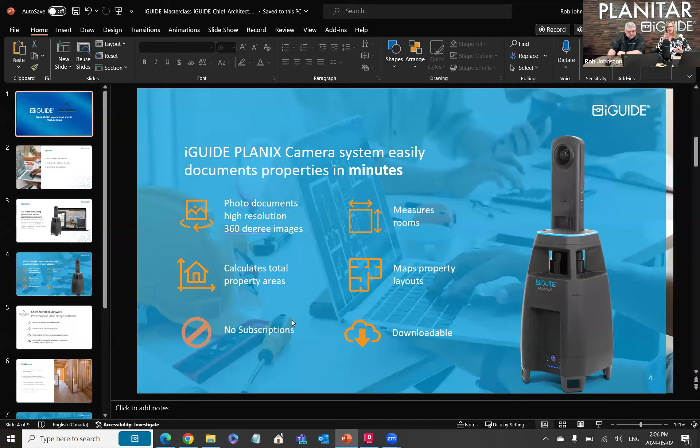Sorry, guys. So essentially today we're going to walk through what both of the products are. We're going to learn a little bit about iGUIDE, a little bit about Chief Architect, because we have a varied audience in terms of experience. Then we're going to dive into the solution, and then we'll talk about some of the benefits—how you can talk to your clients, team, customers, and partners about the benefits of using Chief Architect files and iGUIDE files to build your business forward. So do you want to scooch us through? Crisis averted. My pleasure. Yes.

So you've already mentioned what we're going to do. Charlene and I are on the front end of this equation, getting back to the core idea, which is all about getting to remodeling faster without compromising accuracy. Our camera system is used to quickly capture spaces and accurately provide documents that you can move into Chief Architect to get to your remodeling proposal. Everybody in this space realizes the amount of work involved to capture existing conditions, capture the customer's vision, but also capture the technical side—the drawings and math data involved to propose a renovation. Our product has been around for about 14 years now, and only in the last few years have we pivoted one of our outputs to help support this market, which is the DWG file.

We're now approaching our third iteration of that, developed and refined based on feedback from people like Phil, Chief Architect, and all of our customers about what they're trying to do with it. So we now go and capture properties with our Planix Pro camera. We capture it in roughly 30 to 40 minutes, depending on the size of the residential property, and then produce a DWG output so that you can move that into Chief Architect. Phil is going to walk through that process at a high level to promote some dialogue within the users here. But that's our product in a nutshell—we're at the bookends of the system: going onto the property, capturing the data quickly, subject to difficulty but capturing it accurately, and then producing an output format that can be consumed in a variety of different ways.

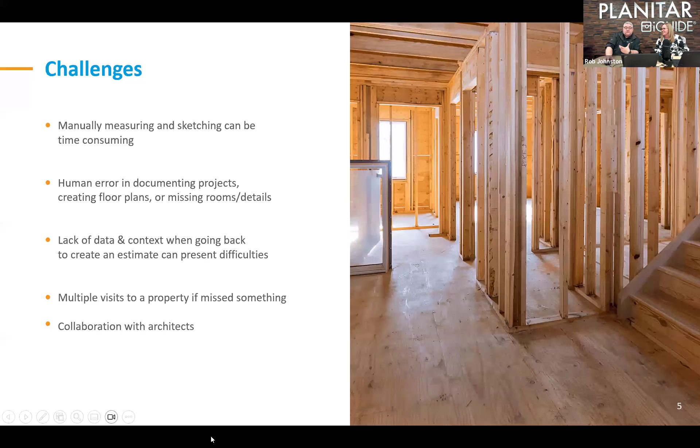So those are the challenges on the front end that the iGUIDE addresses. I'll speed it up a little bit. I'm just going to show you a sample drawing from our output now, which is kind of the starting point for Phil. So again, this is kind of a sample output from our iGUIDE system.

This is what's called an AutoCAD DWG file. This is a premium file, and it's obviously at scale, dimensioned with labels, with ceiling heights. Everything's organized on AIA layers. And what's brand new to us as of January this year is when you scan a multi-floor property, all of the layers are aligned. They're not floating islands that you have to put together - we actually use software tools that we have.

So even though we're giving you individual slices or individual layers of the property, basement, main floor, upper floor, if you actually bring them into Chief or a CAD product, they're all aligned by common walls, load-bearing walls, or exteriors, depending on what you're trying to do. So this is our output, which is the consuming engine on Phil's side.

So Phil, I'm going to stop sharing, and maybe you can start from this input.

Sorry, only because I'm new to this, like full ownership. I'm in marketing, guys. This is why I work with people like Rob, who are much smarter than me at DWGs.

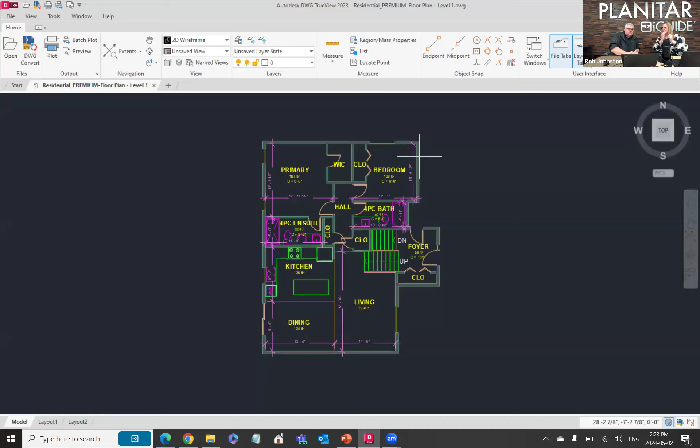But for folks maybe newer to iGUIDE or newer to DWGs, can you walk me through the key highlights of this DWG? If I was to explain it to an architect and say, hey Mary Smith architect, this is what's really great about this DWG and why I trust it, if you were to give me 3 points, Rob, I don't want to go too deep, because I think this also plays into why it works well with Phil's solution, if I understand correctly.

So I'd say the number one thing is that it's drafted against the LiDAR data. It's not people creating a wall based on two measurements, it's creating a wall based on thousands of measurements. We're fusing the laser data that came off of our system, and we're creating the geometry, whether that's walls, windows, doors, patios, whatever it is. We're using the LiDAR data to capture it and draft to that.

And tell me, how accurate is LiDAR then? If you're going to tell me this is perfect, it's great, you can trust it, Mary Smith architect, how accurate is it? Across the property or room, that's a really difficult question, because it depends on the property, depends on how you shoot, but we say a quarter of an inch.

Okay, that's good. And when you say, sorry I ask so many questions, but I know people ask, when you're talking about how I shoot, are you talking about how many times I scan? Because we see there's a difference in opinion here, where it could take you 3 hours or it could take you 30 minutes. That's just how many times I would scan using my camera, is that what you mean?

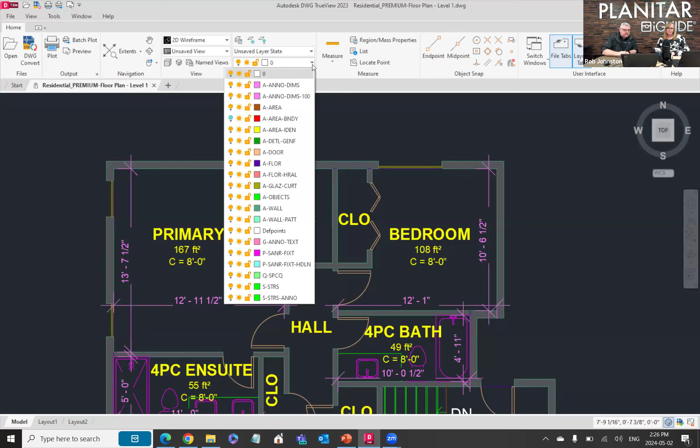Any architect in North America familiar with architectural standards knows we draft everything and put them on the appropriate layers. And then the room labeling, as simple and silly as it is, when you're looking at a property externally and weren't the one who went on site, the room labeling helps you get up to speed with the property that much faster.

I have a good question from Bruce. He asks, can you get measurements of the smaller dimensions of the room? He found that square footage is calculated from the largest measurement of the rooms, i.e. doorway entrance of the room. So he's probably looking for things like counter height, doorways, and those details, calculating the measurements and bringing those together.

So again, we're drafting a 2D floor plan of what the LiDAR captured. If there are other pieces of the room that you need dimensions for, you're going to use our measuring tools within the iGUIDE - measure mode 1, measure mode 2, measure mode 3 - to get those extra pieces of dimension. But we're only drafting what the LiDAR has measured. You do have the ability to find those measurements using the iGUIDE tools. So real quick, the quality of the geometry, the layering, and the labels are what really sets it apart.

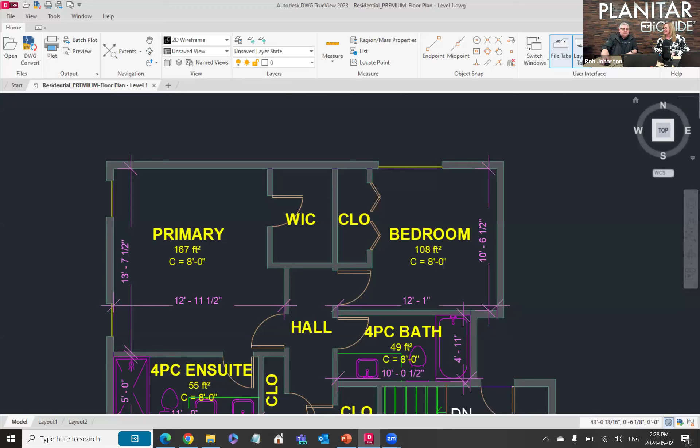Okay, Phil, you ready to take this show away? I'm going to stop sharing. Phil, this is a great place for me to jump off the diving board, or for you to jump off. I'm excited - I don't know much about Chief Architect, and Phil's an expert, so he's going to show us all the tips and tricks. I'm going to take a moment while Phil's getting prepped to look at some of the questions here.

Alyssa Hoffman has a good question. She's a 20-year plus Chief Architect user and about one month into using iGUIDE. Should she use iGUIDE on the inside or outside of a building? Can she have iGUIDE create a 3D file for Chief, and import the Revit 3D file into Chief? So a couple questions there - using iGUIDE inside and outside, and also importing a 3D file into Chief.

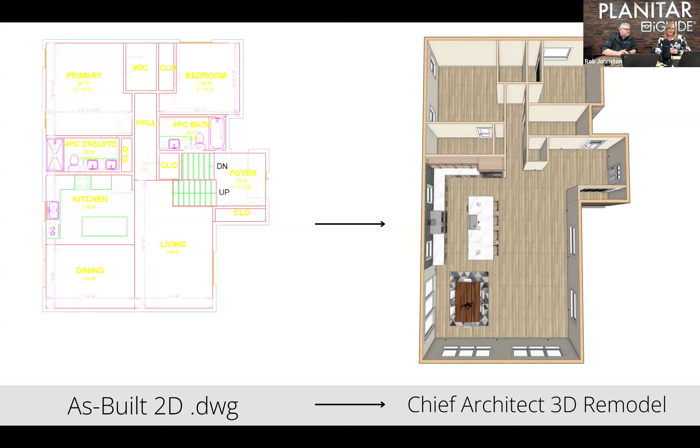So you can use it inside and outside. You have to set your expectations of what we're going to draft outside, because we're an inside measuring company, but we will draft external objects. That requires a much longer explanation than we'll answer today, but you can do both. And yes, we can draft Revit files, but I believe the best input to set up renovating spaces in Chief - Phil will answer this - is to go with the 2D DWG format. Okay, awesome, great questions coming in. Go, Phil.

Perfect. Before I get going, can you guys see my screen? Yes, perfect. So as we've been alluding to, once you've gone through the iGUIDE capture system, you'll be produced with a DWG file that looks something like this.

And then from here, you can bring it into Chief Architect, convert it to your as-built file, and then create that copy of the as-built file - call it the remodeled version - do your remodel work, and then you can overlay the two to show exactly where those changes will be occurring.

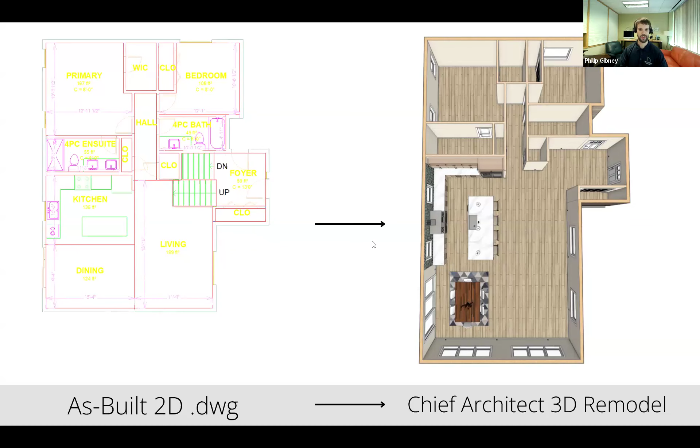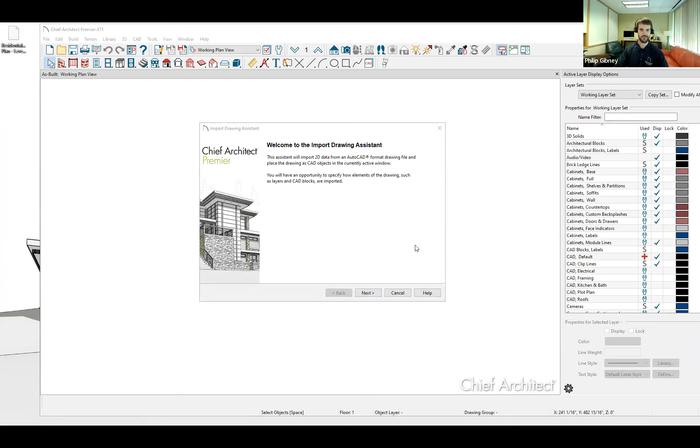So let me pop open Chief Architect real quick. All right, so here I am in Chief Architect, and I'm just going to bring in a CAD file that Rob sent me. I have that CAD file right here on my computer, and I'm just going to drag and drop it into the screen. When I do that, it's going to open up a wizard that will ask us some questions about how we want that file to import.

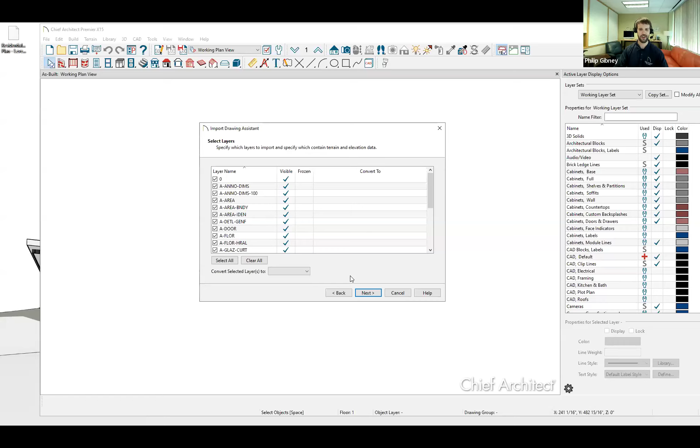So on the first menu of the wizard, it's going to ask you some questions about some miscellaneous file settings. I'll just go ahead and click on the next screen. If your CAD file is a topo survey file that you've obtained, you can convert that into a Chief Architect file. We're not covering that in this webinar, but it's something that you can do.

This menu is asking what you want to do about the layers from the DWG file. We want to bring those layers in as we had left them off in the iGUIDE system. This next question asks about your unit of measurements. I'm going to leave them in inches and click OK.

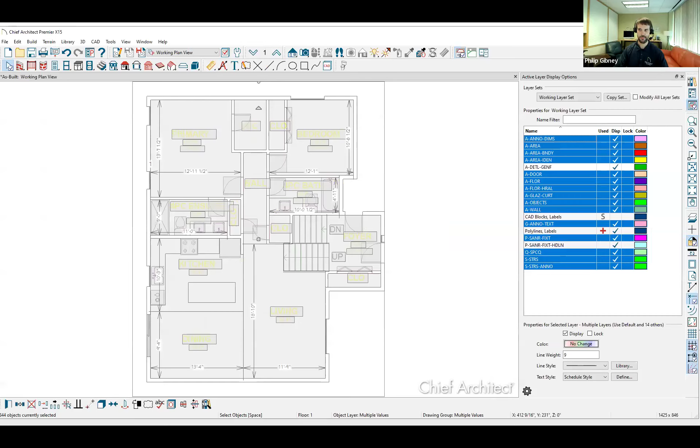Then we'll click on Finish and see what we get. Once I've done that import, we have that CAD file exactly as it was left off and captured within the iGUIDE system. Chief Architect is a layer-based program, and on the right-hand side of the screen I have my various layers. These layers towards the top are some of those that came in through the iGUIDE system.

Now, when you do the CAD to wall conversion to convert it into a 3D model, the only thing Chief Architect will convert into 3D is the structure of your plan - so your walls, doors, and windows. Things like your cabinets and your fridge don't come over during that conversion, but they can be manually added later if you need to see them in the as-built conditions.

So when we do the CAD to walls conversion, the first step is to recognize what layers all of the individual objects are on - we need to identify the layers for the walls, doors, and windows. On the right-hand side I have this menu open called the Active Layer Display Options. If I click on one of these lines representing the wall, we can see it's on the layer A-wall. At this point we're just making a mental note, and we'll proceed to recognize the layers for the doors and windows.

Next, let's do the doors. I'm going to click on one of the doors in the plan, and you can see it's on a layer called A-door. One thing I'm observing about this layer is that the individual lines making up this entire door are blocked together in a CAD block. When you do the CAD to walls conversion, you need access to the individual lines that make up the walls, doors, and windows. So I'm making a mental note that I'll need to take these CAD blocks and explode them into individual CAD lines, which I'll do here in a second. So the doors are on the A-door layer.

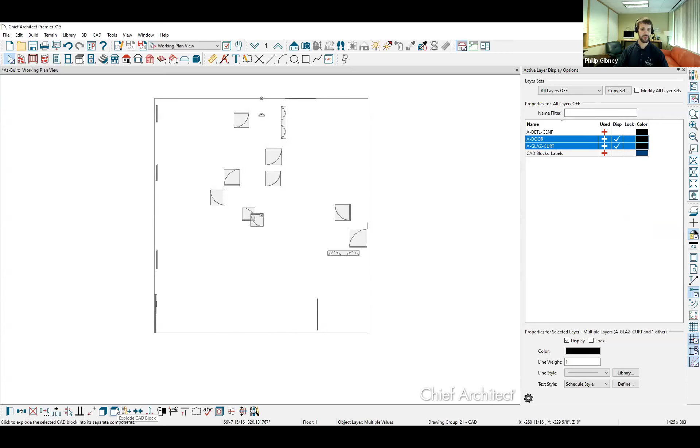Next, we're going to turn on the layers for the CAD lines representing the doors and the windows, so that's all we see in the plan, and then we'll explode them into their individual CAD lines. To do that, I'm just going to left click with my mouse and draw a marquee over the doors and windows - I've got them all selected. Then in the bottom toolbar there's a button that says 'explode CAD block.' When I click on that, it explodes them into individual lines and they're no longer CAD blocks. That's all the work we're going to do with exploding them.

The next thing I'm going to do is turn off those layers for the doors and windows. I like to keep my layer sets clean as I need them. With all layers off, I'll turn those layers off and then come back to the working layer set.

So we've now obtained some information that we need to do the conversion to a 3D model. That feature that does the conversion is called the CAD to walls feature, available by going up to the CAD menu and then down to CAD to walls.

This menu is going to ask you to tell the program what layers from this CAD file are going to represent the walls, windows, and doors. So from this drop down, I'll say the wall layer is going to be that A wall layer, the window layer is going to be that A glaze layer, and the door layer is going to be the layer A door.

Making our way down the menu, you could do railings if you wanted to, but we're going to skip over it.

Below that, there's an option to set wall types. Wall type 1 I have set up to be a wall type called siding 6 plank - it's made up of a sheet of drywall, a 2x6, OSB, and then a plank siding material. Wall type 2 is a wall type called interior 4 - it's a half inch of drywall, your 2x4 which would be 3.5 inches wide, and then another half sheet of drywall. So the total thickness of this wall type is going to be 4.5 inches.

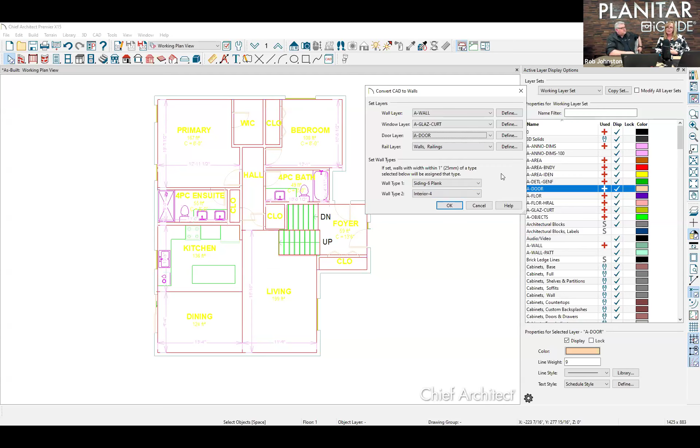So the way the wall thicknesses work is, let's pick on these red lines representing the interior walls. These lines are on that layer A-dash-wall, and the program is going to measure the distance between those two lines. If whatever that measurement is within 1 inch of the thickness of either of these wall types, it's going to try to use one of these wall types. So in this example with the interior 4 wall, if that wall is within a 3.5 to 5.5 inch variance, it's going to use that interior 4 wall type and place it there.

So from here we can just click OK, and then the program should produce our CAD to walls. Let's take a 3D view and see what we have. Up at the top, there are different 3D camera tools - one of them says perspective floor overview, and then we'll be in our 3D view.

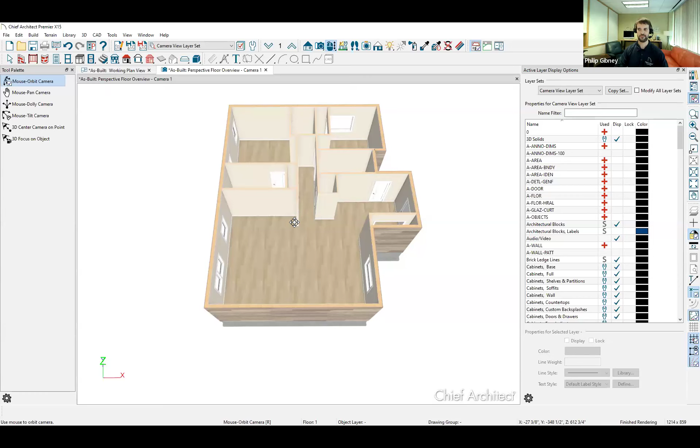That's cool. I was just going to take a step back and mention something Ivan asked - the thickness of those walls is usually determined when you're capturing a property. It asks you, when you're on that floor, what is the exterior wall thickness? They typically key in a value saying this is a 4.5-inch wall, or this is a 6.5-inch wall, and they key that in, and then our drafting team knows what to draft it to - especially if you've only captured the inside of the house.

It goes back to, well, how thick do you want me to draw the wall? So that does come easier. Yeah, good point.

So in Chief Architect, this may be a bit of a deeper dive, but there's this concept of wall types where you're building out how those wall types are constructed in regards to drywall, stud, OSB, and so forth. So you're essentially setting the wall thickness through those wall types. And with this iGUIDE system, if you're setting the wall thickness, you want to make sure your wall thickness in Chief Architect matches with your guys' thicknesses.

When we were on our DWG 1.0 level for about 8 months last year, we were still drawing wall types that weren't uniform. So where Ivan may have experienced different wall thicknesses as it came into Chief, now when we launched to 1.2 with the North American drawing standards, they're all 4.5 or 6.5. That's how we're going to correct for it or draft it on our side, unless there are notable exceptions.

There are always notable exceptions, architecture has different things going on. But by going to the default standard North American wall thicknesses, it makes things uniform to our standards, and that way it's a lot easier for Chief Architect to consume and get to that point pretty quickly.

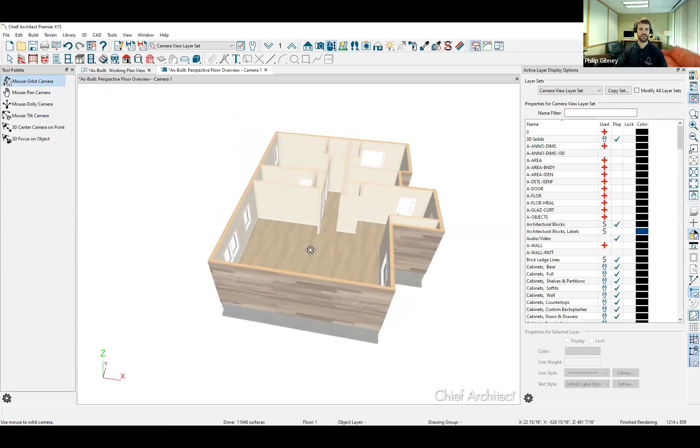So once you have something like this, a couple things happen. Chief Architect has a lot of automated features to jumpstart the design process. You can see a foundation automatically came in underneath these walls, framing gets automatically built within those walls, and if you have roofs, those will get built as well.

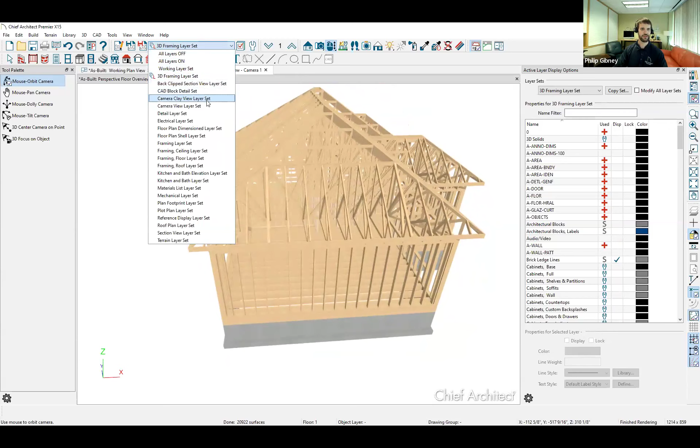So from here, we're in the as-built version of our plan. But if you need to make a model to show the client 3D renderings or get your construction documents produced, the first thing you want to do before making any changes is create a copy of the file and call it the remodel. To do that, you would go to File, Save As, and give it a name.

Before you do that, can I ask a question? There are a lot of our customers that will measure the basement and capture the foundation. Sometimes it's bare concrete, sometimes it's studded, sometimes it's drywalled, sometimes it's the big white insulation. But if we drafted that and moved it over as its own basement layer, could we import it as a drawing and assign it as a foundation and use that?

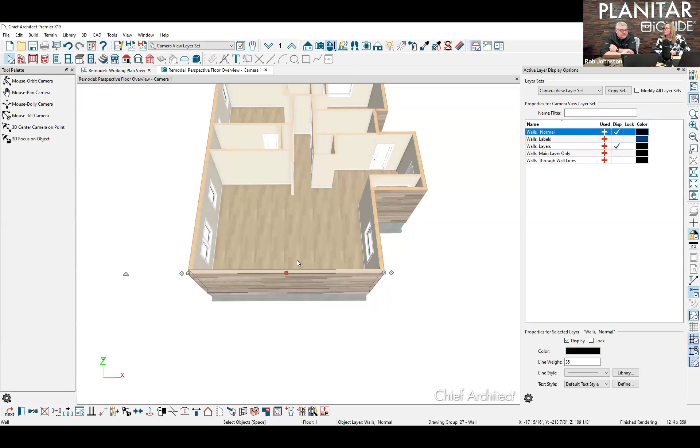Good question. What you would want to do in that scenario, in my opinion, it would be easiest to get a second CAD file for the basement, so you have two CAD files, one for the first floor and one for the basement. In Chief Architect, up at the top there are different floor indicators telling you what floor you're on. You can create a basement, or go down to floor 0 where I have that foundation. When you initially start working on your foundation or basement, you can have it be a blank canvas, then import that CAD file of the basement and do the same CAD to walls conversion to get the basement in place.

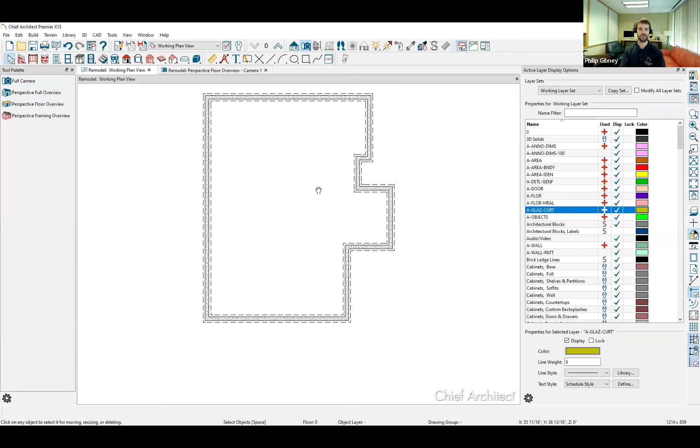Same thing with the second floor, you would go up and do the exact same thing if you had one. And because we're exporting them as aligned, I assume that means they would be aligned when they come in and automatically stick the foundation underneath the main floor. It should, yeah, it should go to the drawing origin coordinates when you do that initial import.

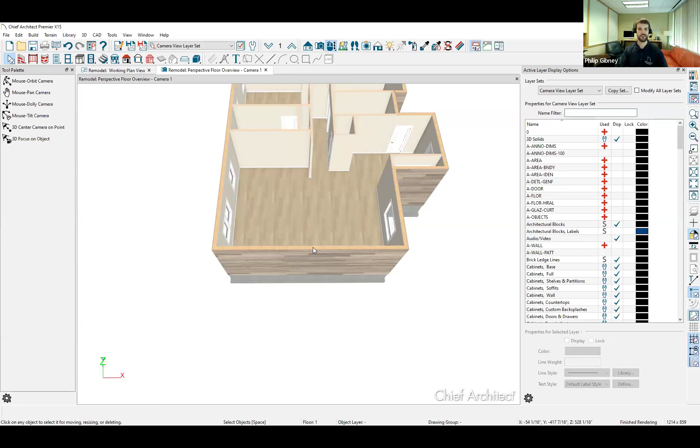Great, thanks for that, I know it was a deviation, but let's show some remodeling. So let's say in our hypothetical scenario we have a small kitchen and a small dining room, and we wanted to do an addition to expand the kitchen and dining room. We're in the remodeled plan, which is the appropriate plan to do the work in. For example, let's say we wanted to move this wall out so we have more space over here, then put in sliding doors over here, and add some windows over here.

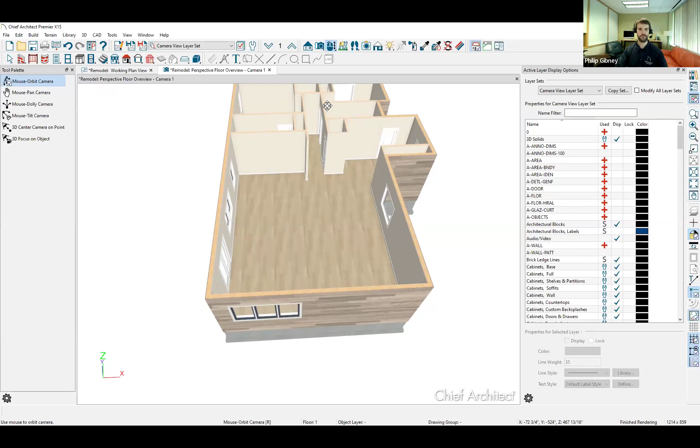There are cabinetry design tools, you can add cabinets and create your kitchen as needed. At the end of the day you'll have a fully fleshed out remodeled plan. I have a second copy of this file where I've already gone through and made a fully fleshed out remodeled plan, so I'm going to close this one and open the other one I have.

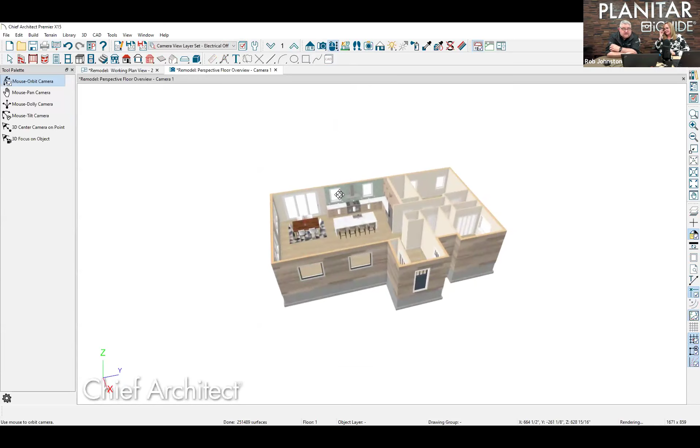I have a question, Rob always has questions. Phil, can you go to the 3D version of this? I always hear clients make a statement: I need to get to the rendered version of the proposed renovation or remodel, not quickly, but efficiently, and make it look nice. So how does that appear, or what would they do in Chief?

3D rendering is automatic in Chief. You don't really need to do any extra work to create a 3D view such as this one. There are different rendering techniques that show or hide different levels of detail.

For example, let's say you made this initial design of the kitchen and you wanted the client to give you feedback about the free-form geometry of the kitchen, but you don't want them to get bogged down by this backsplash material or the countertop material. I'm in a rendering technique right now called the standard rendering technique. If we wanted to hide this level of detail about the specific tile or countertop selections, we could switch to one of these other rendering techniques, such as this one called hand-drawn lines.

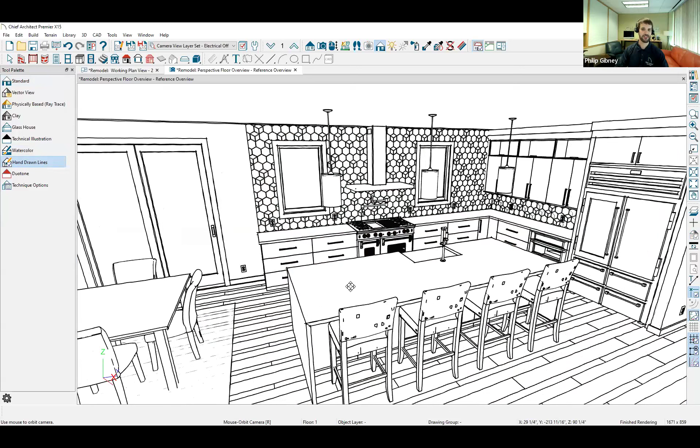This one removes some of the color from our design. Instead, we're seeing a black and white version of the model. It's an easy way to minimize the distractions the client might see and keep them focused on the task at hand, so there's not a lot of extra work needed to create views like this. It can help gear your sales pitch with the client in the direction you need it to go.

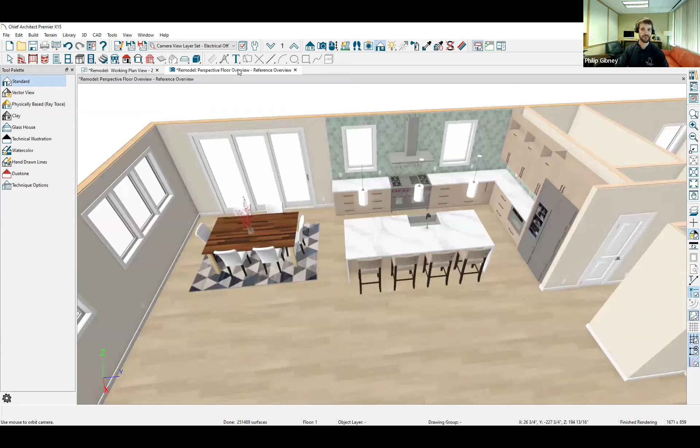This is the 3D version of the model. You can work in both 2D and 3D at the same time, having these pulled up side by side as you need to. So I'm in this floor plan view and you can see the kitchen that I have. Up at the top of the screen there's a drop down to switch between different views you might create, like an electrical plan versus a framing plan.

So this is fine and dandy for a floor plan view, but it might be a little difficult for a client to visualize how the two changes look one on top of another.

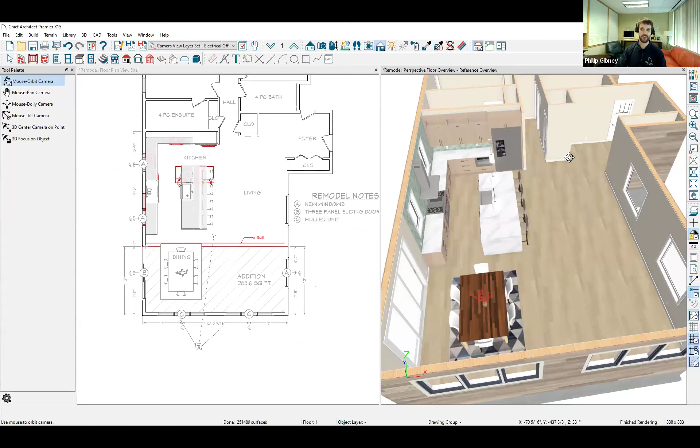That referencing also works in the 3D view. So if I jump back to this 3D view and press that F9 key again, it'll turn on that reference. Now it's very easy to see, hey, this is where this wall previously stopped. If we bump this out about 12 feet, you'll have room for a larger island, and then you can have a nice sized dining room as well. And hey, this is where your island was before.

We can turn that 90 degrees and have a much larger cooking area in this space.

So would you say - and I know the answer is going to be it varies - but would you say a lot of your customers just focus on changes to walls, windows, and doors, or do they go to the full extent of remodeling, like putting in a new kitchen, new cabinets, and so on?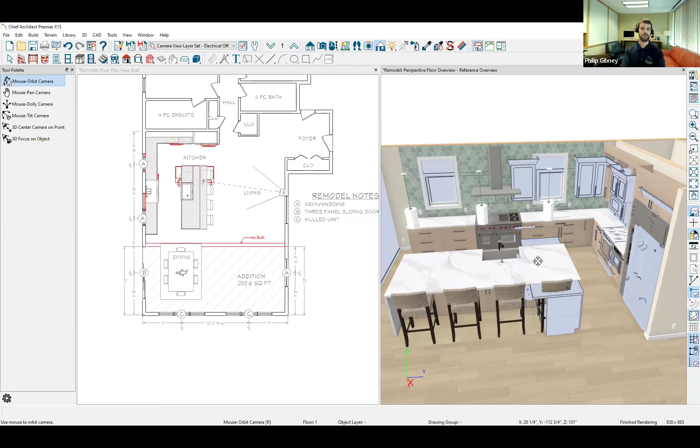I would say most of them go as far as the project entails. If you're doing something like a sunroom or a new deck, you probably don't need a model all the way out to showing cabinetry and furniture. It's something you can add as a bonus to give them better ideas of what the depth of space might be and what furniture will fit. But you need to listen to what the client's end goal is, and add that level of detail. If the client says 'I need a new kitchen,' you're probably going to go as far as adding all the cabinets and appliances like I've done here, so they can get a better idea of how their new cooking and cleaning area will come together.

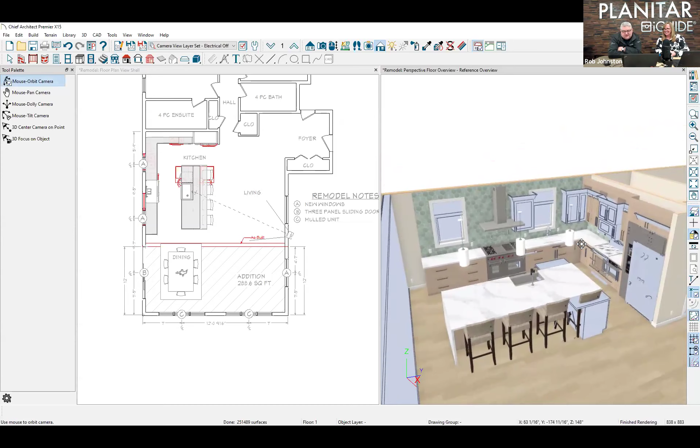So now I have a question that takes us all the way back to the beginning. Is there any way you could go back to the way you originally brought in the DWG file? Yeah, I should be able to. Let me pull up the as-built plan - I've got the remodeled plan open right now, let me pull that up.

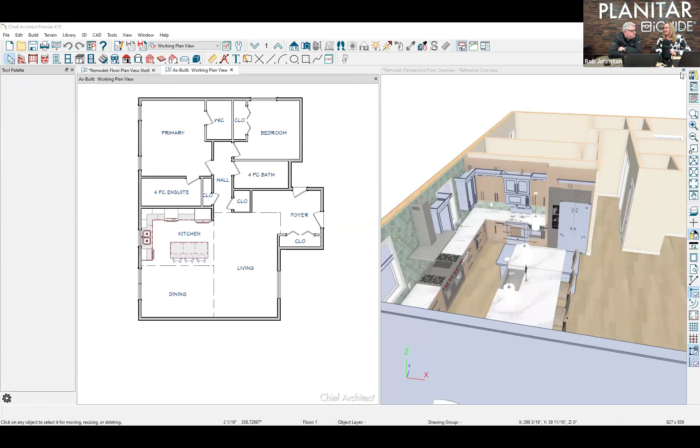As you're pulling that up, Phil, we're having a bit of a chat, and I know I'm very conscious of time - we're under 10 minutes now and I want to make sure everybody gets their questions answered. But we're talking about electrical components and HVAC. So in terms of capturing the HVAC and electrical - we'll call them necessary but maybe not so sexy details of a home - how does that apply with the iGUIDE system? How can you do that effectively, Rob? I think that's one of the things trending in our chat here.

At the current time, we don't model MEP components - mechanical, electrical, or plumbing. So outside of water heaters and furnaces, we don't do that today. There's a lot of reasons for that - we come from a floor plan company, not a 3D layout or mechanical design drafting company. It's not to say there aren't things in place to start adding those, but today as a deliverable, we don't do that. But we do have tags.

So with tags you can take photos. Obviously coming at it from a new perspective, where I'm not as seasoned as you are - we have a system where you can take photos or capture video and integrate that into your iGUIDE, and use that for contractor purposes, if you're looking to document some of those details. That's the way a lot of people are doing it today. It still doesn't end up on the drawings, but it ends up in the 3D tour. So if you want to tag assets, take measurements to those assets, measure the length of a pipe, or measure an outlet - yes, all of that data is internally contained within the iGUIDE. But today they are not ending up on drawings.

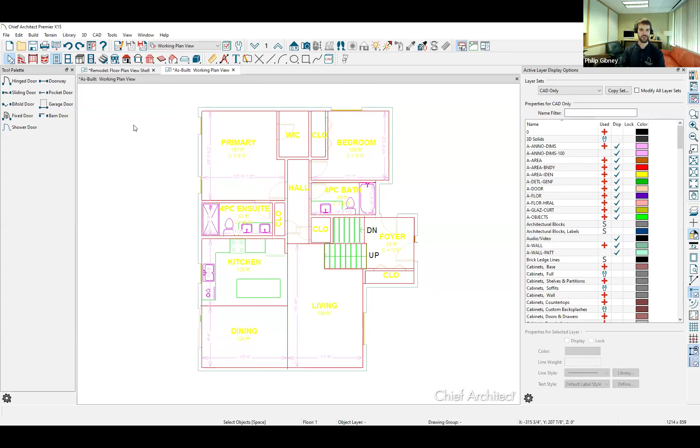Something I've observed from watching people do that over the years is one benefit of tracing over it is it makes you conscious of all the nooks and crannies of the model. If you do a CAD to wall conversion, you might not be aware of some details even though they're there. Whereas if you're manually tracing over walls and placing doors and windows, you're very conscious of what's going on in every corner of the plan.

So there's not a right or wrong way to do it. If your DWG file is in a very clean format, it's easier to recognize what's what, and it's the fastest way to convert it to a 3D Chief Architect model.

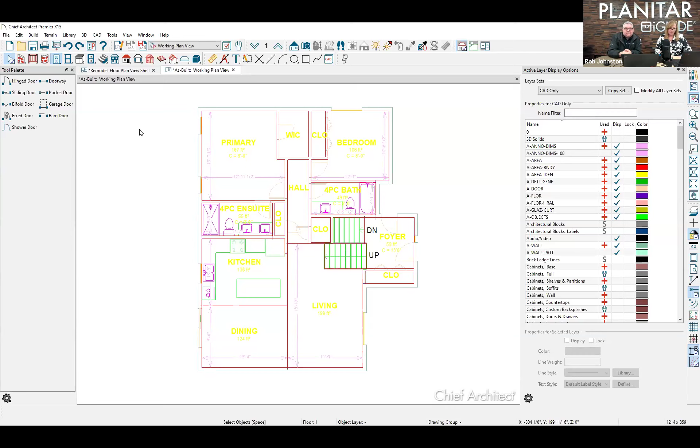And I think that's where the other element of our output comes into play, when you've got the 3D walkthrough of the facility and you can stand in the room and say, what was going on with that shelving? You can evaluate that without sorting through pictures or mentally figuring it out, even if you've never been to the property.

Yeah, absolutely, so it makes it very easy for all trades to be on the same page. Another thing with the output in Chief Architect—I've been showing 3D renders directly within the software, but you can also export renders as images, record video walkthroughs of the 3D model, and we have an interactive mobile app where you can send a 3D model to someone in view-only mode so they can navigate through it on an iPad or in their web browser. So there's all sorts of communication tools to keep the client and all parties on the same page.

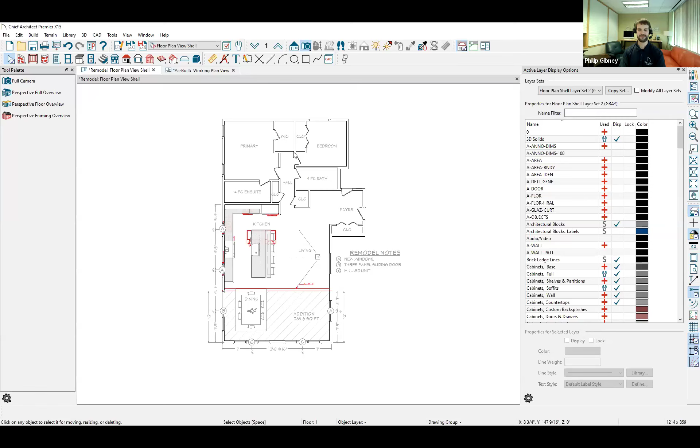I love this, I'm excited. Honestly, Phil, until today I didn't really know how Chief Architect worked, and I'll admit I was too afraid to jump into it. But now I feel like I have a bit of a handle on some of the things it can do.

I just want to follow up, we have a few questions, some I can answer, some I'll get you guys to answer. For existing operators who joined us, we have a question about the software being available. As an iGUIDE operator, you have the DWG add-on available to you—you can just select it when ordering your iGUIDE, and it's available for any new or pre-existing iGUIDE. So if you needed it for an iGUIDE you shot, maybe for a client doing a renovation on a home they bought six months prior.

And now they're saying, well, we want to do a renovation. Is there any chance you can give us the iGUIDE? Could you give us something? You can go back to them and say, actually, I can give you a DWG of that space and you'll be able to use that. So that's a nice way to build that relationship, or upsell your client slightly when we talk about how to market yourself.

And then as well, there's no subscription for that. So it's a pay per project use, you pay per the square feet. All those details are available on the website, but I can include a link in our follow-up emails so you can find those easily.